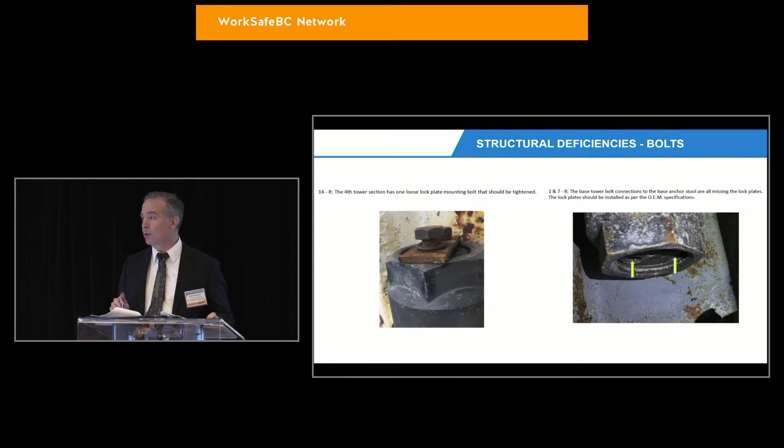Examples of other structural deficiencies: bent, dented lattice in the apex sections, bent, dented lattice in the mast sections, bent, dented lattice in the boom sections, top chord of the boom, damaged trolley wire rope, significant corrosion in pendant lines, corrosion and heavy paint flaking on structural members. Here, the inspector ran a string line to reveal bowed lacings in excess of the 3 millimeter tolerance.

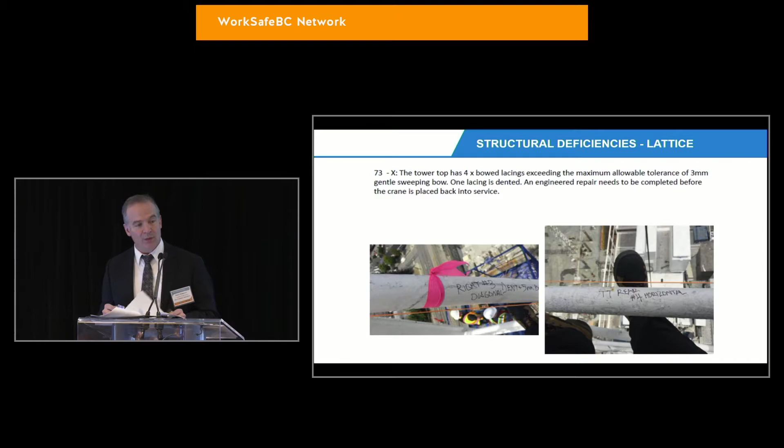Not the best photos in the world, so they probably won't make Story's book. But these examples, the tower sections have multiple weld repairs throughout the structural members, indicating metal fatigue. The lifespan of the original design of this particular crane, 500,000 cycles, 25 years. The horizontal top of the crane was manufactured in 1978.

An inability to verify the data tags on the tower sections due to excessive paint layers, heavy flaking, resulted in not being able to verify manufacturer dates of the tower sections. There was no supporting documentation on the history of the tower sections. These should have been sandblasted, inspected, then primed and painted before placed into service with a service record to accurately memorialize the repair. These tower sections are in poor condition due to extensive corrosion, deteriorating paint condition, and our inspector even surmised that the paint might be lead paint.

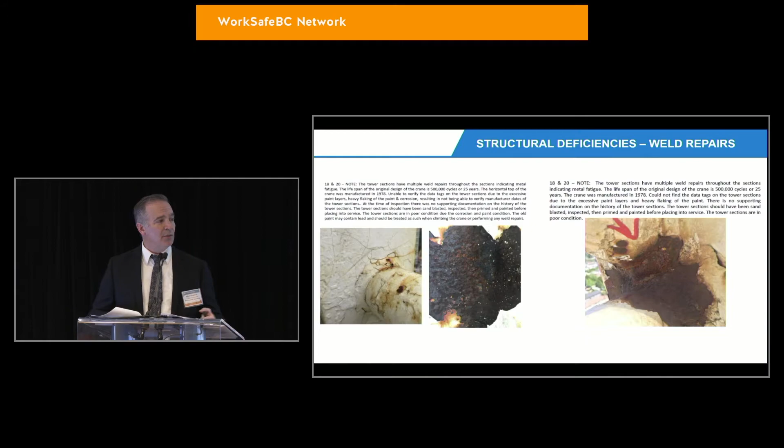The jib seen here on the right has significant damage and deformation to the top chord. It exceeds maximum tolerance. A string line that was run tight showed the deflection of 10 millimeters. A clarification from the OEM engineer stated that they advised the crane be taken out of service immediately, and they were researching a possible repair or perhaps another component to replace the current jib.

The email from Terex Cranes read, "Based on the jib photos I have seen, the upper chord appears to have sustained localized damage to the extent that we would advise the crane be taken out of service." Pretty straightforward, and we did exactly that, stop work with that crane.

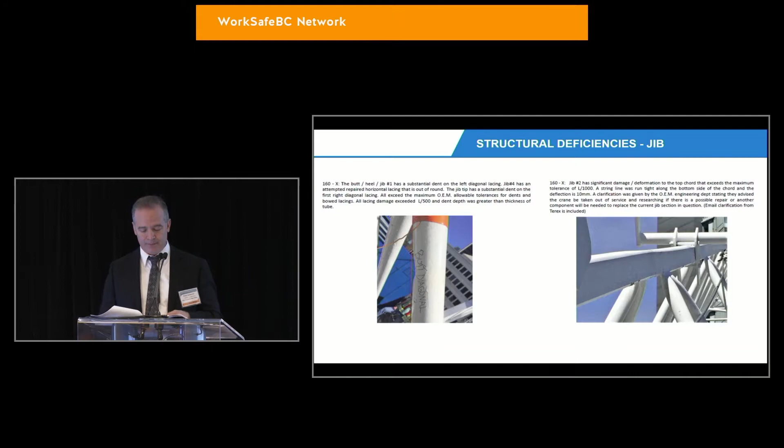The cables. The pendant lines for this crane severely corroded with severe pitting on the individual wires. The condition indicates that these pendant lines have reached the end of their service life. They should not have been erected in this condition or placed into service.

Ultimately, there were significant differences of opinion between the crane manufacturer, the wire rope manufacturer, and the crane owner's engineer regarding the condition of certain deficiencies, necessity for immediate repair, begging the question and concern of why 2 or more experts have such significant differences of opinion. To our knowledge, the engineer and independent inspector manufacturer did not adequately communicate, even though we provided contact details and encouraged communication. This opened up an opportunity for Ledcor to be that facilitator.

To understand this condition, we contacted Unirope and replacement recommendations were confirmed. This wire rope is past any retirement criteria due to heavy corrosion. And given the condition of the wire rope and likely age, it is estimated that the wire rope has a wear loss somewhere between 25 and 50%. Tower crane pendant lines are to be routinely lubricated as required by the manufacturer specifications. This is to keep the inner core from prematurely wearing and reducing corrosion on the wire rope.

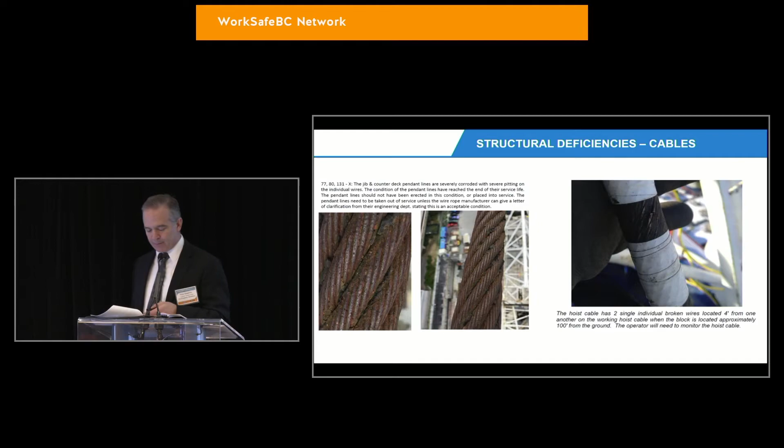Cotter pins, rusted, not secured, too short, not tethered. This is a flaw noted over and over again in the inspections. It seems trivial, but then ask, what would happen if a cotter pin fell out or broke off during operations? What then? Who is verifying that the safety elements of the assembly have been properly installed and maintained? And who is verifying that any noted deficiencies have been addressed? This is the collective responsibility of the project teams and another reason for targeted third-party inspections.

Our inspector even noted for the cotter pins, if they were to fall out, now you have a falling hazard at such heights, you could really do damage to equipment and, more importantly, to people.

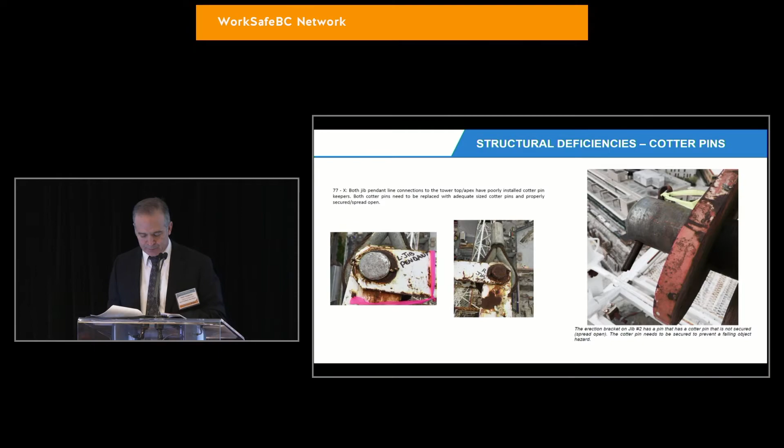The trolley final limit, set-out limit for this particular crane set 5 foot from the trolley stop. Typically, it should be set about 12, is it 12 inches or 12 feet from the rubber stop? 12 inches. Here too, the wooden trolley radius markers have been installed on the jib using tie wire. The tie wire is not adequate to securing anything on a tower crane. Proper secure mounting brackets should be used in order to prevent falling object hazard.

Our discussion with the Engineers and Geoscientists of BC, formerly APEG BC, Stuart's going to follow me up here on stage, learned that they are working with industry and WorkSafe BC to create a guideline for how to write their reports. We noted there are no formal guidelines currently outlining how engineering reports should be written. Engineers have concluded that more of an explanation and justification is required from inspecting engineers. And Ledcor anticipates meeting with all of them to further discuss this for implementation.

Our reports from the third-party inspecting engineer include a checklist, include multiple photographs, each of them about 18 pages long. We conducted independent reports on 5 of our cranes, so I'm going to spare you from going through page by page on all of them, but it's significant to see the similarities, but also the challenges faced by different cranes in different operating conditions.

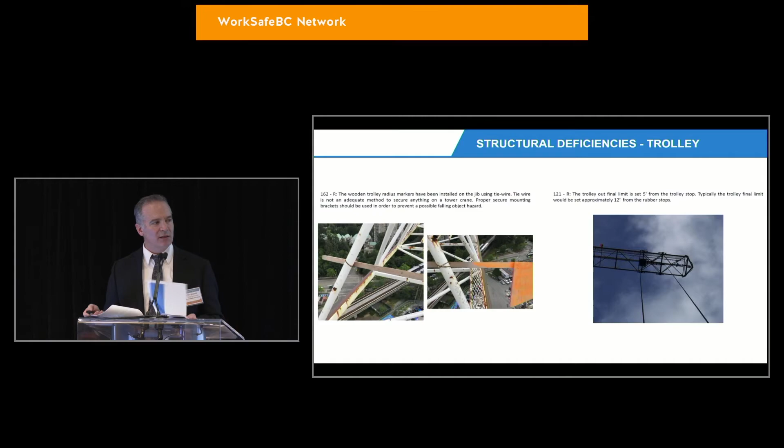So our actions. The question is, how does Ledcor handle the information from its inspectors and notify its teams of safety concerns? Misadventures, you're all familiar with them. Contact with a high voltage electrical source, shock load, loss of load, brake failure, collision or upset, or any other circumstance that may impair the safe operation of the crane or hoist.

So if a crane or hoist has been subject to a misadventure, it must be removed from service until a professional engineer has supervised an inspection of and supervised any necessary repairs to the equipment, certified the equipment as safe for use at the manufacturer's rated capacity for the equipment. This is not just the judgment of our project superintendent. It is not just the judgment of the crane operator. Certified for safe use.

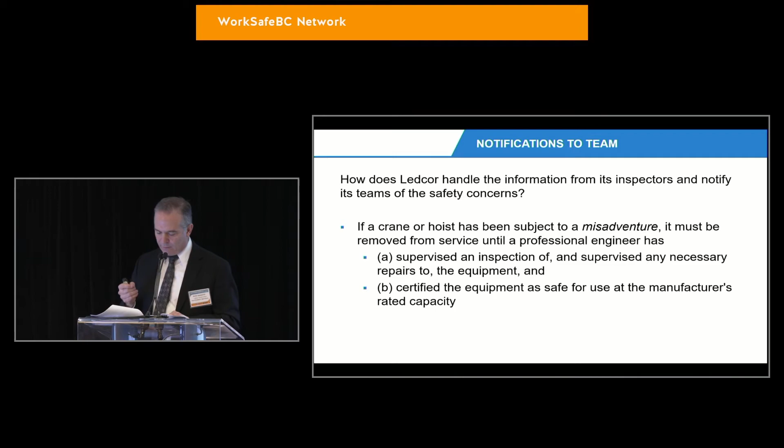So Ledcor issues its safety alerts internally to all of our teams when we have incidents on our projects, any HS&E incident. I've highlighted here some of our specific crane incidents, and when determining a flash level, the criteria asks the author to choose based on the actual or realistic potential consequences of the incident. While this is a judgment call, the flash notification is influenced by the following factors.

People. Most importantly, how did or will this incident impact the people on and around our sites? Assets. What damage was caused or may have been caused by the incident to any equipment or materials. Environment, is there any impact to the environment and to what extent? Reputation, how does this incident impact the reputation and/or public image of Ledcor, its clients, and its construction partners? And security, did this incident impact security, create a loss of property due to a criminal act?

Knowing that situations can almost always be worse, we sometimes escalate the level beyond actual, so we need to be wary of our term over-flashing, and in doing so, dilution of the emphasis and seriousness attributed to A flashes. In other words, we're very careful about how we discuss these incidents because we want to draw attention to our teams, our subcontractors, to make sure that they're given the proper amount of attention and given the gravitas they deserve.

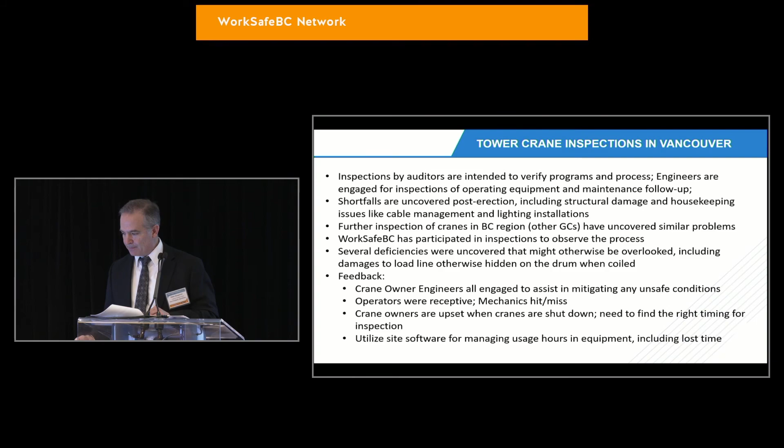The third-party inspections underscore the real need for an independent review after both the inspection prior to erection and inspection at erection have been completed. It was startling for us to learn that the system that we relied upon, the system we used to verify that the cranes were safe and in good order, was missing important content.

For Ledcor and its subcontractors, all of the cranes went back into service, subject to engineers' review of the independent inspectors' inspection reports, and engineers' own investigation of the deficiencies. In some cases, the engineer directed and approved repairs. In other cases, it indicated that the deficiency repairs could be postponed until a later date at the convenience of the crane owner and operator, or even as the crane was being dismantled.

Our thanks goes to the third-party inspector whose findings led us to this point in our learning process, Gregory Teslia from Crane Safety and Inspections, Inc. It helped us to realize and answer the question, why is this so important to our industry? A record number of cranes in use in many cities across the country and around the world. Aging inventory, like all of us, just keeps getting older.

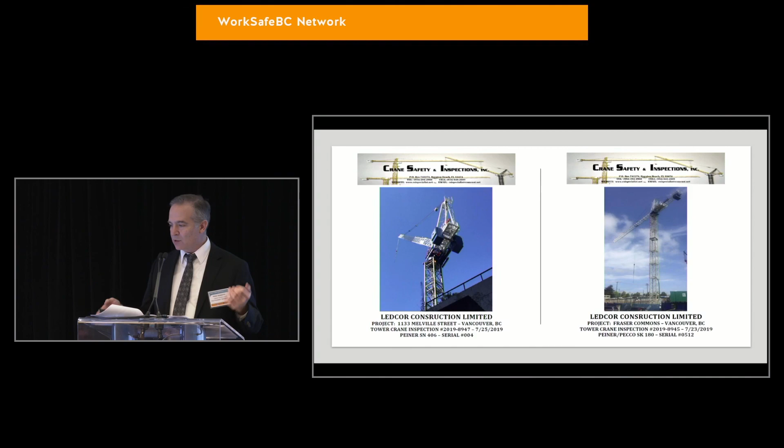And it's more than just the client's problem, more than the crane owner's problem, more than the subcontractor's problem. This is something that we all must address in the interest of safety and proper protocols on our project sites. And this, for us at Ledcor, is how we think safety and work safely. I'm short on my time, but I'll cede the rest of it to Stuart, but I want to thank you all for understanding the importance, from our perspective, of third-party crane inspections. Thank you.